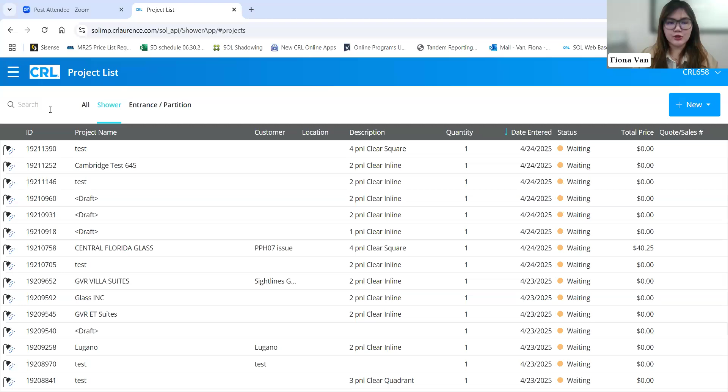The search bar is very similar compared to Citrix. Whatever you want to search up - let's say you want to search a project name containing 'test' - go ahead and search it up, and everything including that test word is going to show up for you to select.

So these are for you to select. You can look up using ID number, anything that you can think of. And if you're done and don't want to look it up anymore, go ahead and click X. It's going to prompt you back.

Before jumping into anything else, I want to make sure I cover the logo as well. When you jump into web base, your logo is going to be a default logo. So if you're new to the Shower Online program, I highly recommend changing the logo right away.

Another thing is, if you are subscribing through Citrix and starting with web-based, all the settings you have for Citrix will be automatically synced to web-based, so you don't have to redo everything. Now, if you want to change or add something, it's going to be automatically synced to both web-based and Citrix as well.

Before jumping in, I want to make sure I cover everything here. Of course, when looking at the summary of all the projects, you will see the ID, the project name, customer, location of the project, the description, quantity of that project you just created, date entered, and then status.

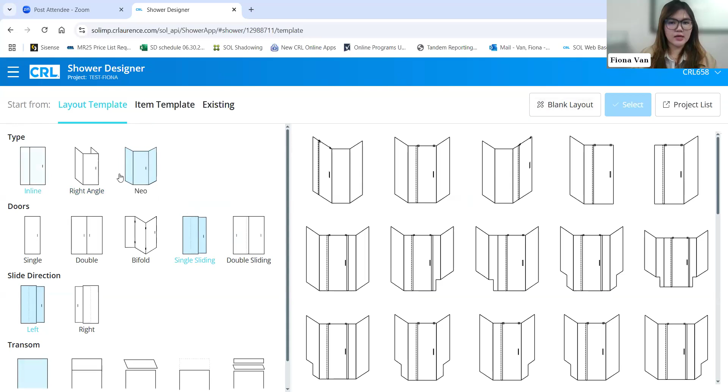Before I jump into that, I want to test something really quick. If I jump into blank layout right now, it's going to prompt me to the second tab, which is layout, where I can select a customized layout. Now, if I was in layout template earlier and I double click onto any of the template, it's going to prompt me to the design page right after.

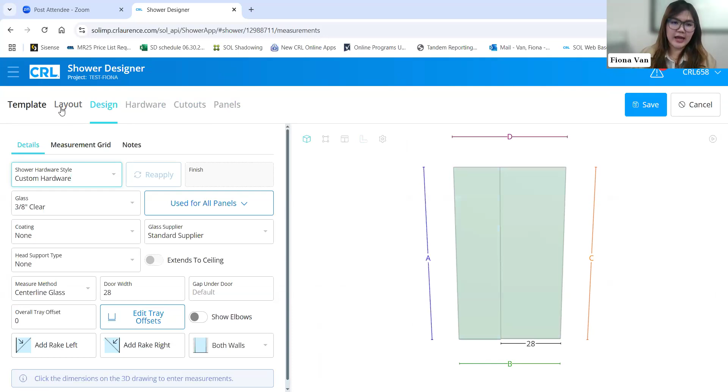So if you want to edit your layout, go back to the layout tab, where I'm going to go ahead and start with this project right now. I'm going to go ahead and remove and start everything fresh.

So when I'm in a layout tab and it's a customized layout, I can go ahead and select if I want the shower to be inline or right angle or neo. And I can basically enter the name of the sections that I'm building up right now.

For the project, you can either add rake left, rake right, or if you know both walls, or if it's going to be running to only the left wall or right wall. So for this project, I'm going to start with hinging my door left.

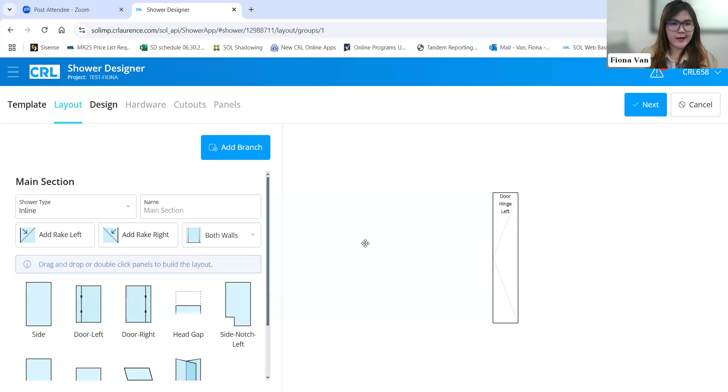I'm going to go ahead and create a side panel as well. However, I'm also going to add another side panel over here. And let's say on the door itself, I'm going into the detail of each panel now.

So let's say on the door itself, I want to have a fixed transom. Okay, so once I select the fixed transom, I can go ahead and select next.

It's going to prompt me to the junction between panel number one and number two. So over here, I will be able to fix if I want to add any nib or any notch. So over here, I'm going to keep it at 180.

But if I click to the next one, it's going to add right here if I want to add any top nib, left fall, right fall, or any notch. It's also going to ask me if I want to extend the transom to the side panel over here as well. If I click fix transom over here, it's going to extend it for me.

Okay, so for this one, I'm just going to select no right now, and I'm going to click next to the next junction between panel 2 and 3. So let's say over here, I just want to do a return panel.

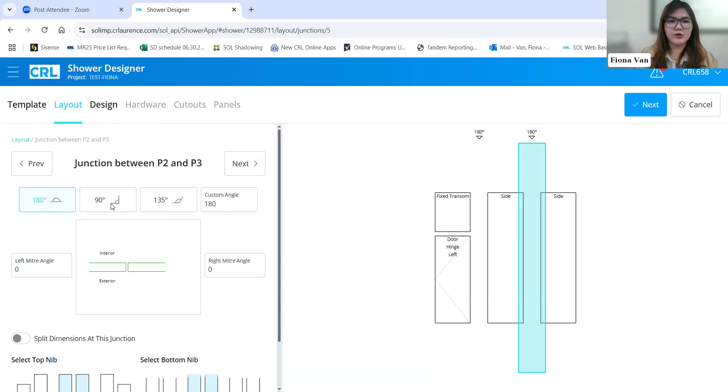I'm going to click 90, so it changes to a 90 degree angle of the panel, of the junction between panel 2 and 3. Over here you can select the intersections, whether you want miter, square, left panel overlap, or right panel overlap. Here I'll just keep everything the same because this is panel overlap, no miter. So the glass is going to look like this, right?

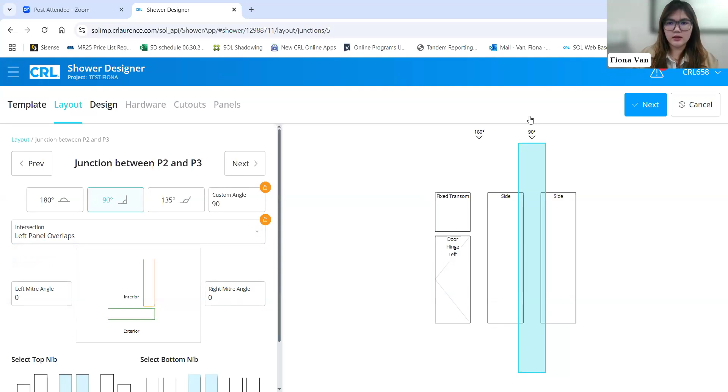Now if I click miter, it's going to automatically change my miter angle of the glass to 45 degrees from the left and right side. So I'll go ahead and select this one again and then click onto the third panel. Same thing all over again, I'll just keep everything the same.

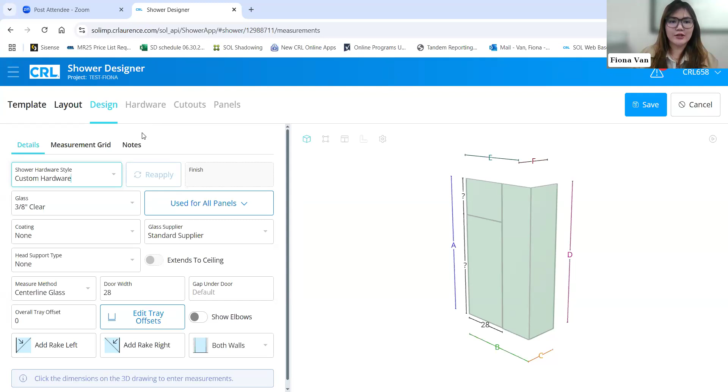Once I'm done with the layout, I can either click on the design tab or click next. When I click next, it's going to prompt me to the design tab again. So over here is where I'll start entering all the details of the shower. Now you can see this is the 90 degree we just selected earlier.

Over here, we already compiled a list of styles that we recommend to our customers, or that are among the most popular. We compiled a list for you to select from, but if you want to add anything else, please let us know.

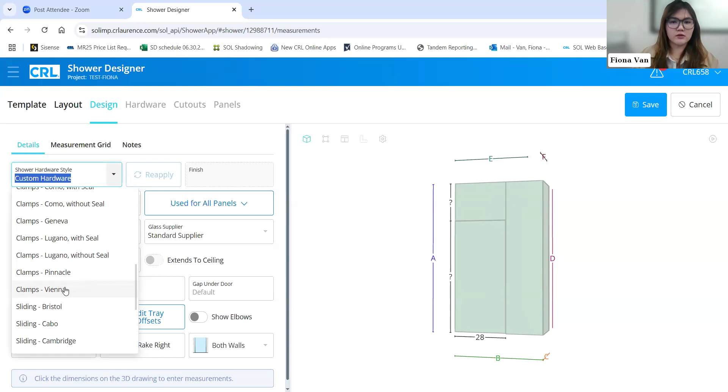Over here I'll just do something simple like Clamps Vienna, and it's going to ask what kind of finish you want. I'll do oil rubbed bronze. And then what kind of glass? Over here we have a list of glass for you to select.

Used for all panels is going to ask what kind of glass you want to use for panel 1, 2, and 3. So for the coating itself, you'll be able to select all of the most popular ones as well, and then of course a glass supplier if you have multiple.

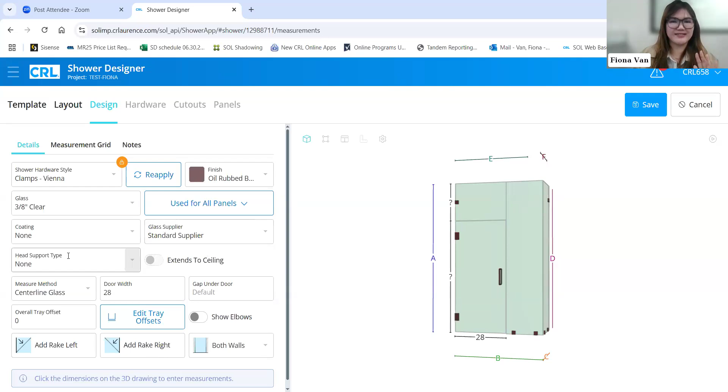I'm going to keep the head support to none right now. It's going to default to none either way, but you'll be able to edit later. However, I do want it to prompt up some issues so that we can look into it, so over here it's going to always black out.

Over here you'll be able to select the measure method. We always, for our program, default to centerline glass. However, you'll be able to select however you want it to be.

The door width always defaults at 28, but you'll always be able to edit it. Gap under the door is going to default for CRL as well, however you'll be able to edit it on the panel later on.

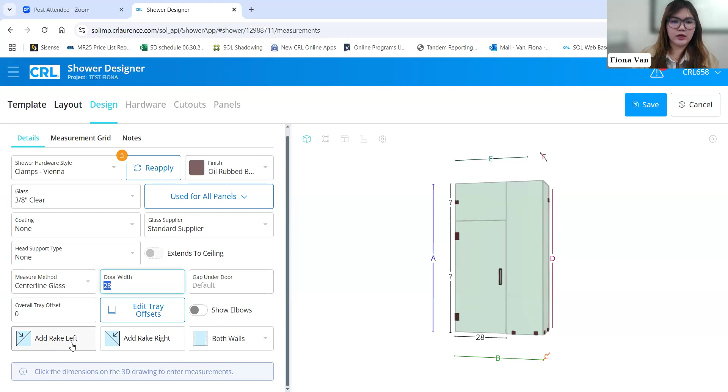Over here there's going to be some overlap when it comes to selections. Of course, it's going to ask you again if you want to add or remove rake on the left or right hand side, and if it's going to be left or right walls only.

Yancy, anything you want to jump in with right now? I think you've been doing such a great job.

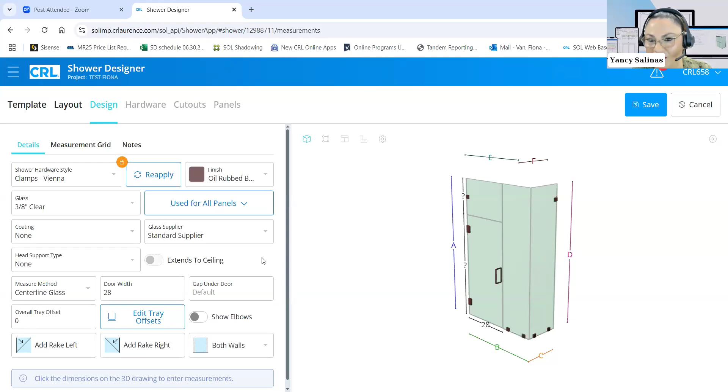Just some minor things here. I know Fiona mentioned this earlier, a lot of the features here are the same as our Citrix version. However, the user friendliness, the fact that you can see the screen here in 3D, the picture quality is a little better with the 3D rendering. We have different options here on the screen where you can have a plan view, a panel view. If you choose to copy the image to the clipboard, you can also do that here. This tool is very versatile, very intuitive, and customizable.

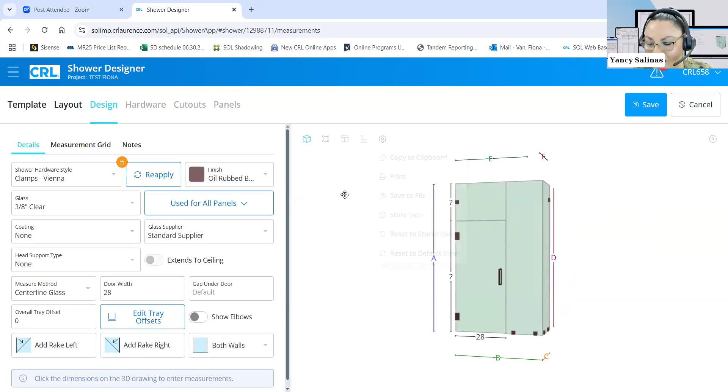I've seen very simple showers created in this tool. I've seen very complex showers created in the tool.

Also, if you have any questions, I did share Fiona's email address in the chat should you have any technical questions regarding a specific design, or if you see that your numbers are not adding up, or any discrepancies, please feel free to reach out to both Fiona and myself. I'm pretty savvy with the tool and its features, but I must admit I'm not 100% an expert in the hardware. My expert here is Fiona, so I will definitely route you her way. But no, you're doing a great job.

Again, with the rakes and the elbows, you're able to do that customization. So far I don't have any questions. Actually, I just saw one from Marcia.

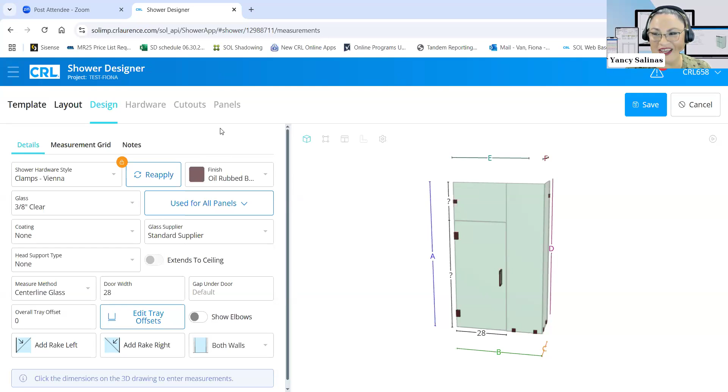Okay, Fiona, please continue. Thank you. Of course. So the next tab I'm going to focus on is the measurement grid over here.

You will see a lot of repetitive questions for you to edit the shower again, but I'm going to ignore all of this and move down to the dimensions where you'll be able to enter them. There are two ways to enter the dimensions: the left side and the right hand side. Over here you'll see that it's color coordinated.

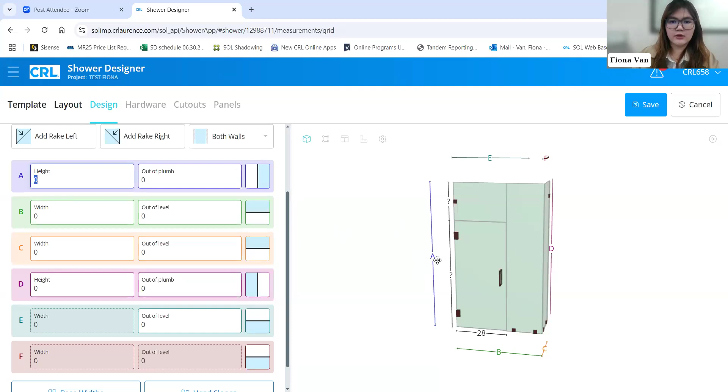You should be able to enter A and correlate it over here to A. I'm going to do something simple like 70. Let's do the width of the B over here at 45. And then I'm going to do the width of the C section, which is this panel over here. Let's do something like 30.

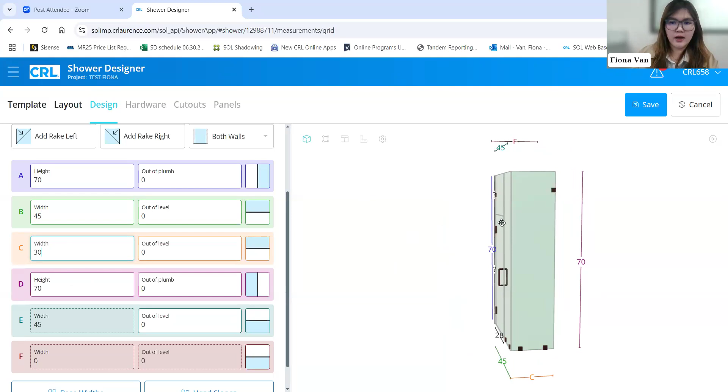So over here, it's going to automatically prompt the height on the right hand side to 70. Now let's say you have anything out of level on the bottom that will be impacting this one. I would enter the out of level as half inch.

I would go ahead and click this. It's going to ask you which side you want it to be out of level. And then it's going to prompt the height of the D section over here to coordinate with the out of level as well.

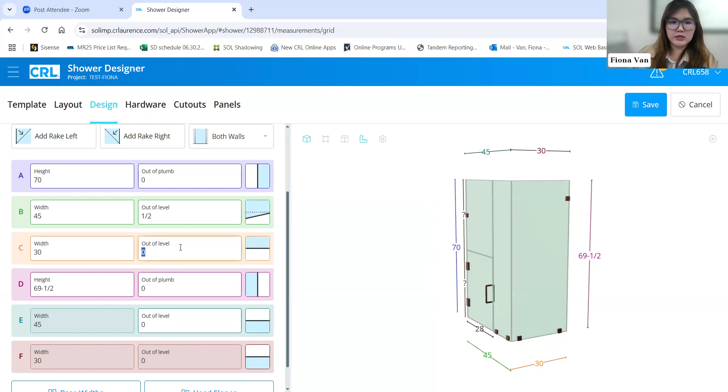Let's say on the C, I'm going to do half inch out of level, and on the opposite side it's going to prompt me back to the 70 inch, because I have this side up and this side down again. So the height of both is going to be the same.

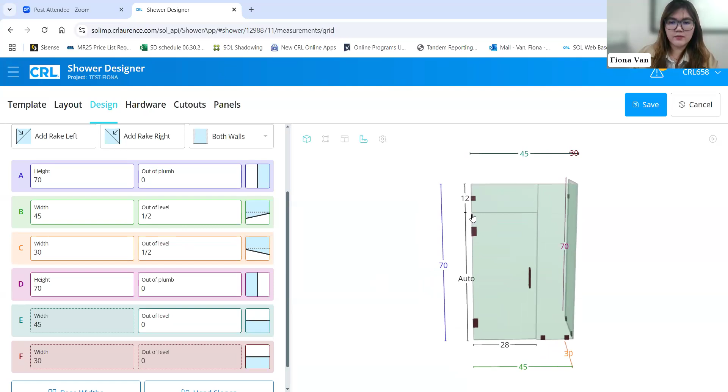I'm going to keep this for now and move on to over here, where I'll be able to enter the transom height. So over here I'm just going to do something simple like 12 inches for height, and it's going to automatically calculate the door for me.

Okay, so once I'm done looking at everything, I can move on to the next thing. If I scroll down, it's going to ask me about the base width and the head slope. On the E section over here, you see the color E, which is kind of emerald.

It's going to ask you for the level on the top, right? So over here it's going to correlate to the head slope that you'll be able to review as well. Because you have a bottom slope down, it's going to ask you if you have anything out of level on the top as well. Over here you'll be able to edit the outage.

So it's going to ask you column one for the fixed transom, and then for the side over here as well, so panel one and panel two. Right here, right? You'll be able to see that panel one is sloping up and panel two is sloping down. I'm going to go ahead and do everything at zero right now.

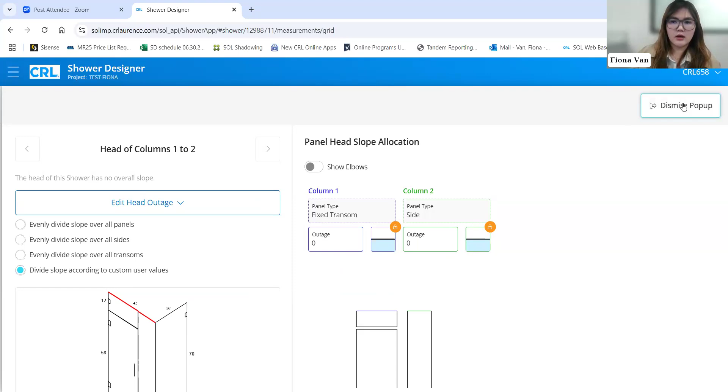So that's simpler for us, and then close this pop up. The second thing I want to touch on is the base width, because we already checked the slope on the top. Now we're going to check the bottom, which is the base width.

So over here, same concept, it's going to ask you: do you want the glass width to be 28 or do you want it to be 26? I'm going to do 26. So it's going to be automatically calculated for me on panel number two, because I entered the total of this as 45, it's going to automatically calculate it for me.

On the bottom, it's going to have a base slope of 5/16 on the first panel and then 3/16 on the second panel. So everything adds up to a half inch slope from left to right, sloping up from left to right, from panel 1 to panel 2. You'll be able to edit this over here, and there's also a summary for you as well.

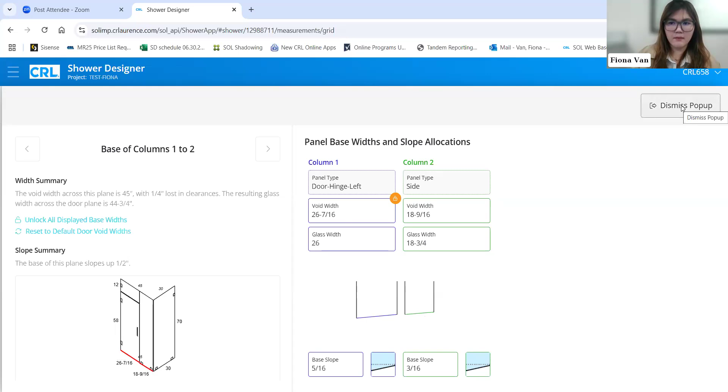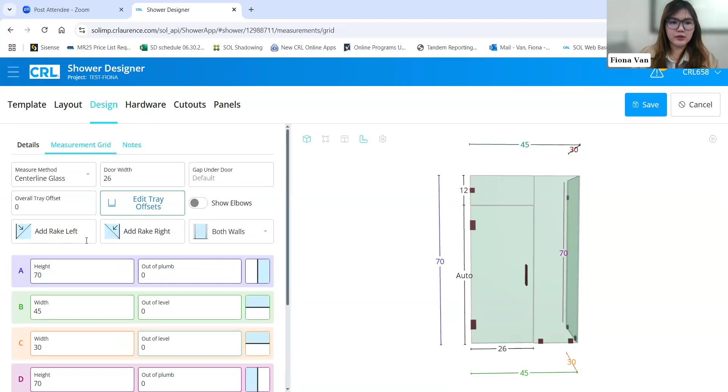So once you finish with this, go ahead and click on this to close the pop-up. It's going to prompt you back to the main page. For the purposes of this project, I'm just going to keep everything level out at 0, so it's easier for us to follow. Okay, so once you enter all the dimensions, go ahead and jump into notes if you want to add any additional notes on the installation itself.

So this is where you will be able to add it. Once you finish with this, go ahead and save your work, and then it's going to prompt up a warning for me.

Now, when it prompts up the warning and you accidentally close it like I did, go ahead and click on the triangle over here up top. It's going to basically give you a serious warning, a safety warning, or any moderate warning over here.

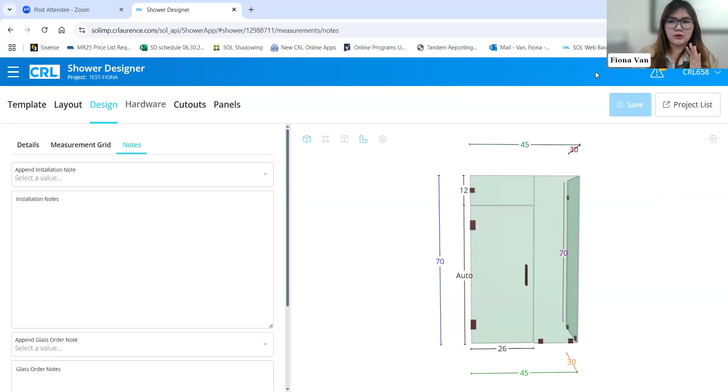So over here, it's saying that I have to add clamps on both the left and right hand side of the fixed transom. So I'm gonna click directly on the warning itself. It's going to prompt me to the page where I can fix the issues, right?

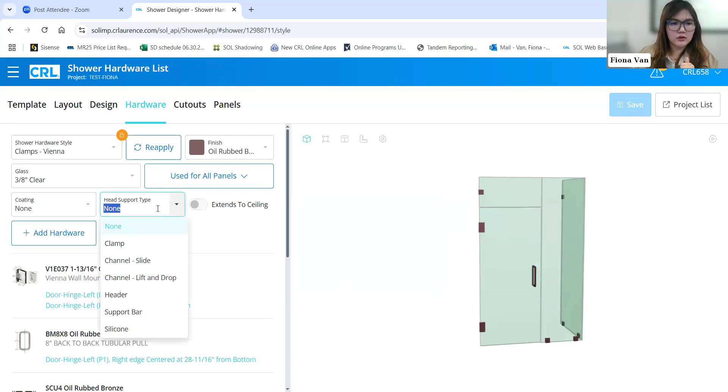A couple of things that I want to highlight is because I don't have any head support, and that's the reason why it's prompting up the different clamps for me. So I'm going to go ahead and do a clamp for head support, reapply for the head support.

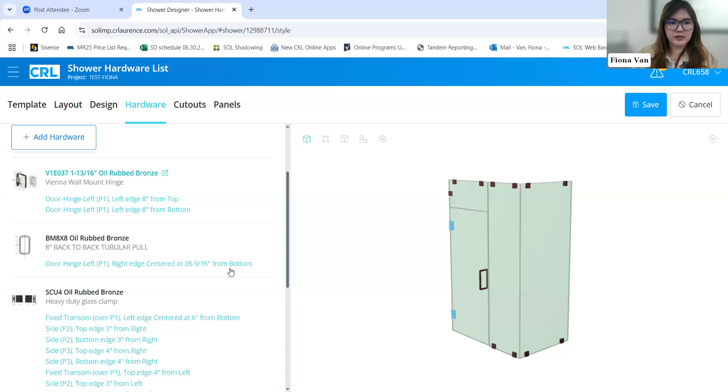Now, when you select a clamp for Vienna, it automatically adds all of the required hardware to this project. So for example, if I picked Vienna clamps, it's gonna add Vienna, it's gonna add a handle for me, and it's going to automatically add, not transom, sorry, the clamps for me as well over here.

Now, everything is automatically added in for me. However, if I want to remove this, there's two ways that I can remove it. I can go ahead and click on the product itself and click on remove, or I can go ahead and click on this pop-up.

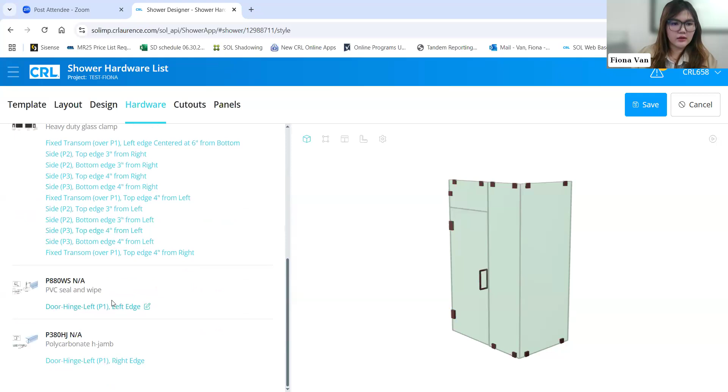And go ahead and click remove. Oops, sorry. And click remove over here.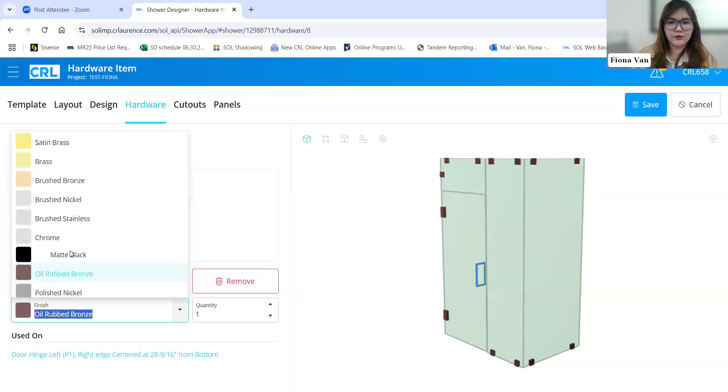Over here, if you click onto, let's say, the handle itself, you will be able to change the finish as well if you don't like it. I'm gonna change it to brass, and then you will be able to increase or decrease the quantity. Once you're done, hit save, go back to the hardware, and you will be able to also add hardware over here.

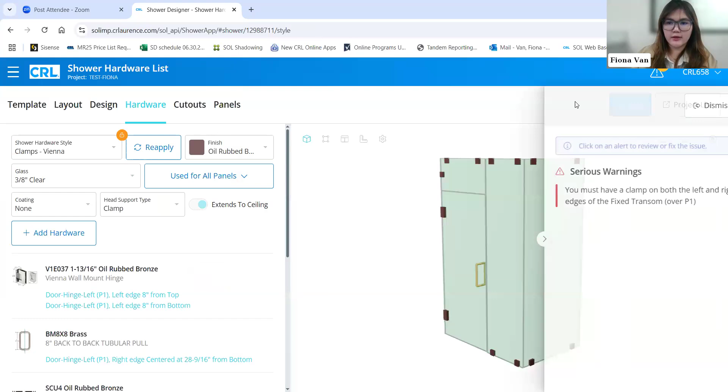So going back to the warning that I have over here, it's asking me to add a clamp both left and right edge of the fixed transom. So I'm gonna go ahead and add transom.

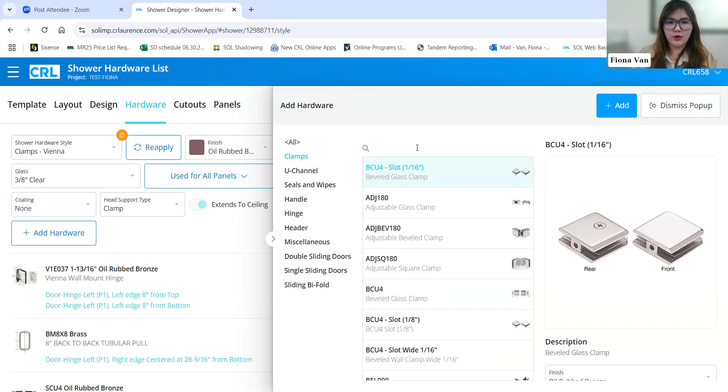You can go ahead and look up any clamps that we have with sections or filter it out for you. However, you can also search all the hardware that we carry as well. You can go ahead and search using just the regular part number, or you can also just go ahead and type in transom.

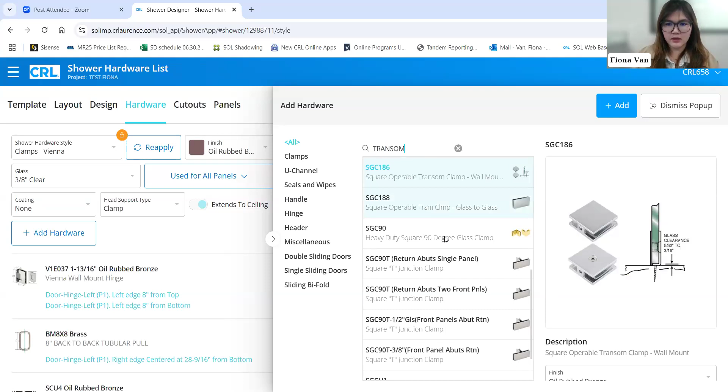It's going to prompt up all of the transom clamps that we have for you to select. Over here, I'm just gonna go ahead and add the BGC188 and click add.

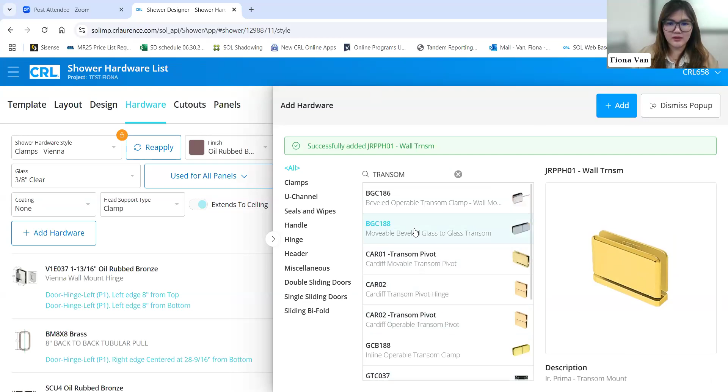Add. Sorry, my screen is a little bit too small for me to scroll down. My apologies, but I can go ahead and click add over here. Not wall transom, I selected the wrong one, but I can click on BGC and click add over here. It's going to say that I successfully added BGC188 to the project.

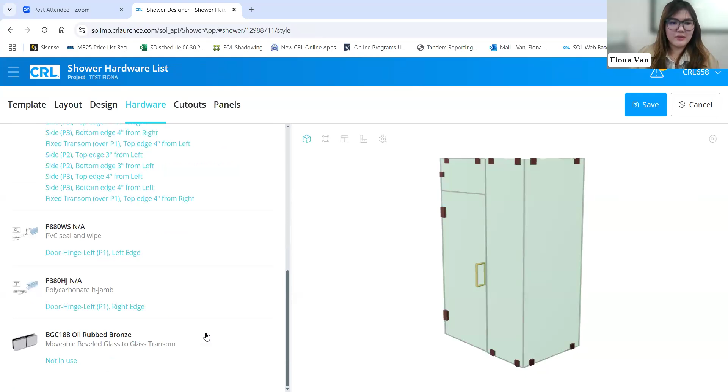Okay, when I add it in here, I'm gonna go ahead and remove this because I accidentally added this and this. It's going to say my BGC movable transom is not in use.

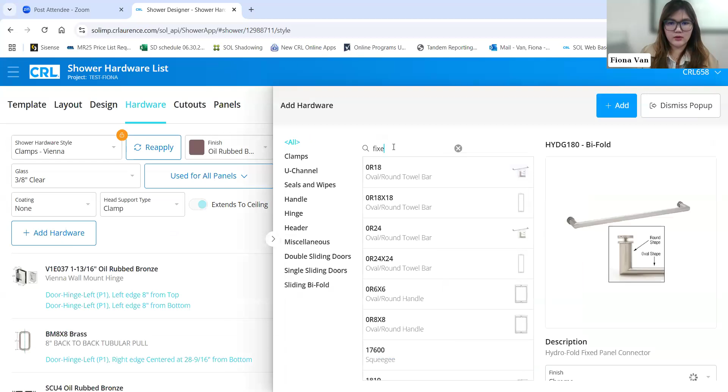Now, because I picked the fixed transom, that's why it's not going to automatically add it in for me. I can go ahead and click on this and remove this, and I can add another fixed transom. Let's see if it's going to pop a fixed transom for me.

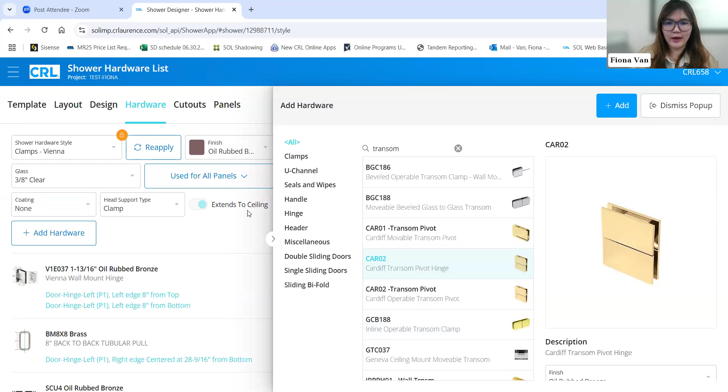Yeah, my apology. I think that my screen is not scrolling down as much as I want it to be. So I'm going to go ahead and remove transom. I do apologize for that. However, you will be able to add the fixed transom when your screen is functioning properly.

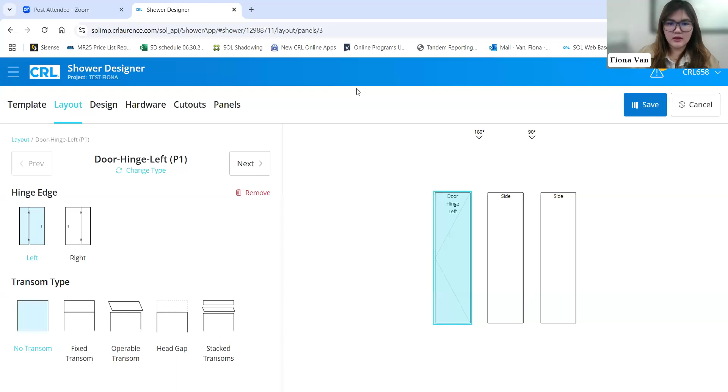So I'm gonna go back to the layout. It's gonna be a little bit messed up, but I'm going to go ahead and do no transom for this one. Okay, I'm gonna save this and then go back to the hardware tab.

So now over here, because I don't have any transom, it's going to just ask me to remove all of the SCU4 that are not being used in the system. So over here, I would be able to click on the SCU4.

There's three that are not in use in the system, so I'm going to deduct it to 8 and hit save. Once I saved everything, it's going to remove the warning for me on top.

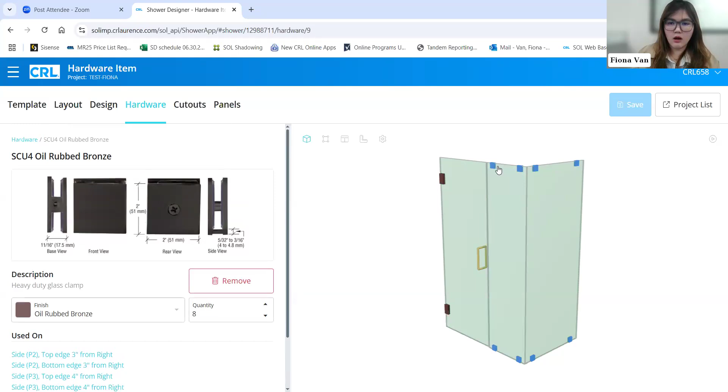Now I'm going to go ahead and jump into each location of the hardware. Whatever you have on the left hand side is going to highlight on the right hand side. So because I click on SCU4, all of the SCU4 are highlighting up right now. If I go ahead and click on this one, it's going to highlight on the right hand side which one I'm selecting.

This is going to prompt me to the glass drawings of that specific clamp. If I want to change this to, let's say, the hinge itself, I can click on the hinge and it's going to prompt me to the same cutout of the hinge.

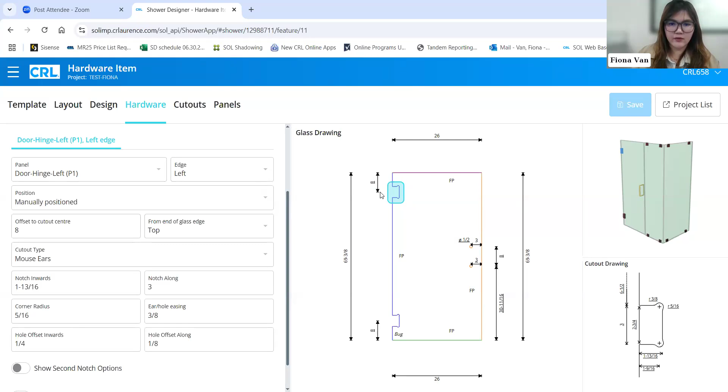Very self-explanatory at this point. It's going to show you the hinge, where is it hinging off, which panel, which is panel number one, the door, which edge is it? It's going to be left edge over here. What position is hinging off is saying 8 inch from the top, so it's hinging 8 inch from the top to the middle of the cutout. So what kind of cutout type? This is default whenever you're using CRL hardware.

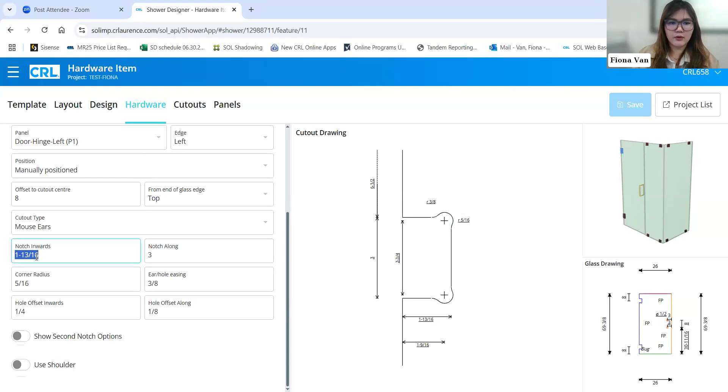You can also see the diagram of it. Now, if you are preferring your own cutout and you feel like this works for you a little bit better, you can also edit it over here as well. And you can also look at the left hand side to the right hand side, it's going to correlate the same information. For example, 1-13/16 over here, notch inward. So all of those are going to be correlated from the left hand side to the right hand side. If you want to swap it back, go ahead and click on it. It's going to swap back to the location of that specific cutout.

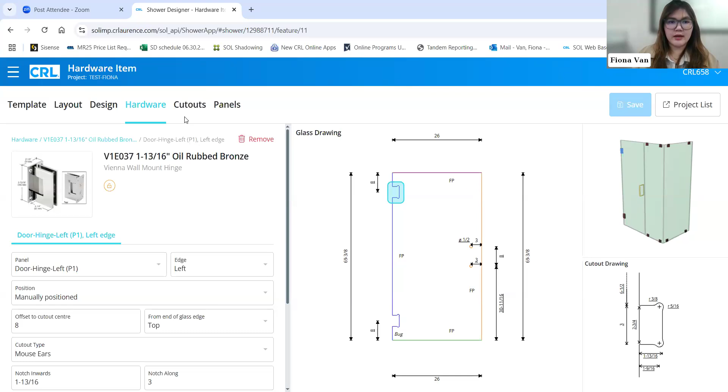Once we're finished reviewing everything and it looks correct, go ahead and move to the next one, which is the cutout tab. At the cutout tab, it's going to ask you to review everything as far as the cutout again. So of course, Vienna, BM, all of the SCU4.

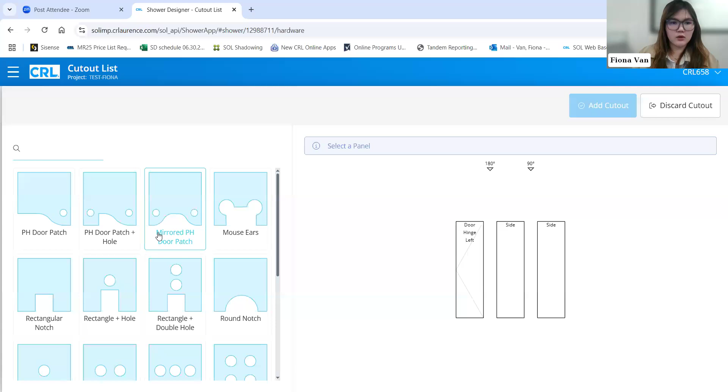Of course, in here you'll be able to edit the corner radius of the glass, or if you want to do an angle corner or remove an existing corner that you just have, this is where you're going to be able to edit it.

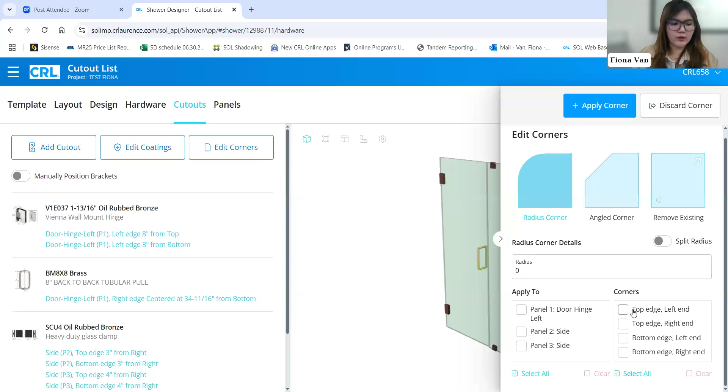Once you finish with it, go ahead and click on the panel. On the panel itself, it's going to ask you to review all of the cutouts and all of the specifications that have been added in since the beginning. So you're reviewing your glass again, the measurement of the panel, panel edges. This is where you'll be able to edit the clearance of it.

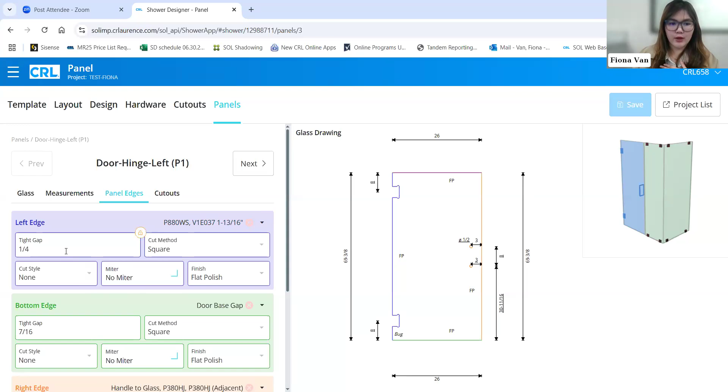For CRL, we default when it comes to clearance that we're recommending. So it's going to automatically add in the gap for you. However, this is where if you're saying that 1/16 would be sufficient for you as a tight gap and you're confident with it, you will be able to edit it as well.

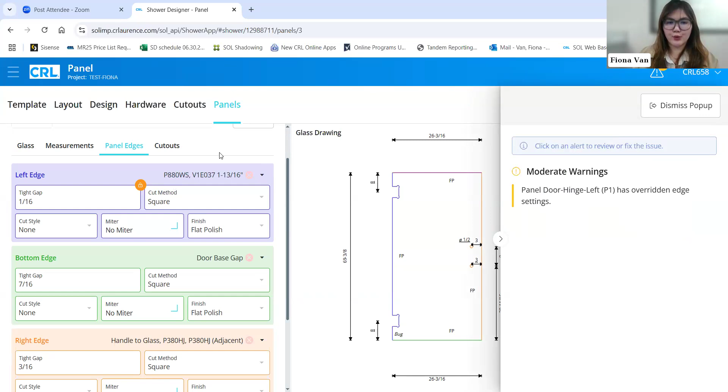Once you edit this, it's going to say locked over here. Now it's going to prompt over here a moderate warning saying that you have overridden settings that we default for. So whatever you are editing, be sure to double check and make sure that it's working before you override everything.

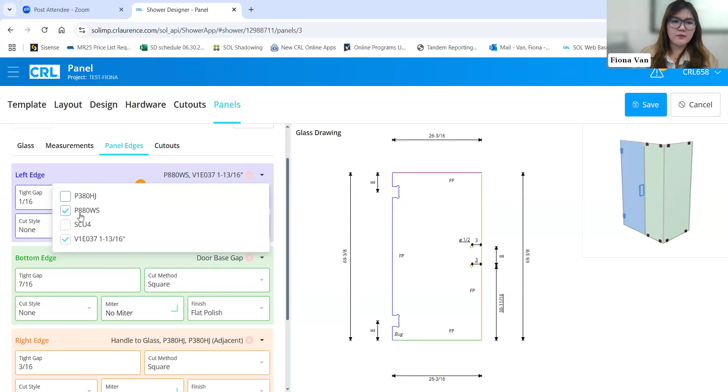Before we jump into the cutout, I also want to review all of the options that you can add in when it comes to the edge of the panel. So over here it's saying on the edge of the left of panel number one, we're using P880WS and Vienna. So it's going to have a tight gap of 1/16. However, if you are using anything for base or anything additional, you will be able to select this and it's going to change the tight gap for you.

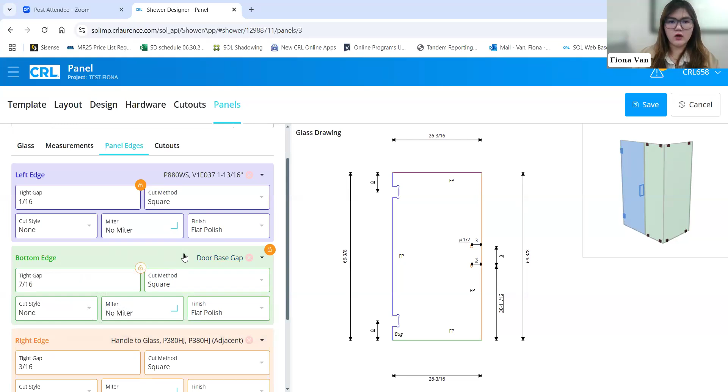I'm going to change this to the door base gap as 7/16 as default. Once you review everything, click on the cutout tab. This is going to be the same replica as this one cutout up top, so review everything carefully on each panel before you move on to the next panel.

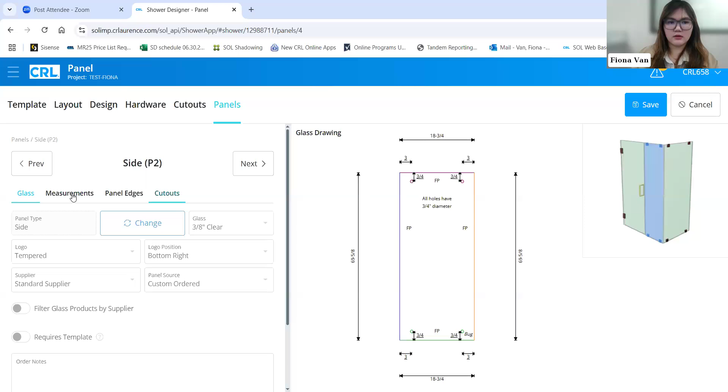When you click on the next panel, the same concept applies for each piece of panel glass. Once you've reviewed everything, hit save, and you will be able to review your template or your project again.

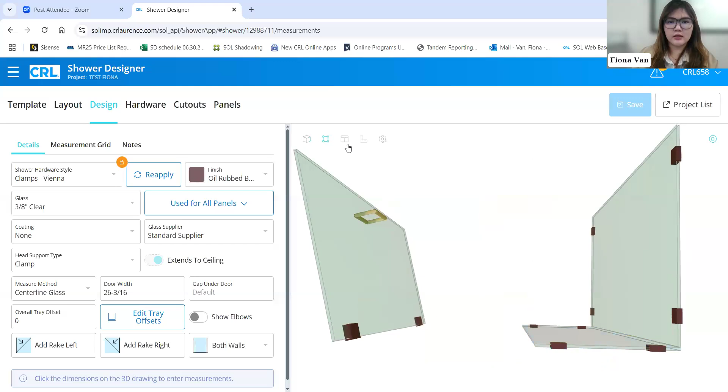For you to review your project, it's very much over here, shown over here on your 3D. You will be able to drag 360 with it or play animations with it. You can also look at top view or a bird's eye view, drag it. You can also see the cutout only for glass.

Black out again. As you can see, we are live. So, unfortunately, the room Fiona's in has a sensor, and the lights will turn off momentarily if it doesn't sense that someone's there. Apologies for that, it's energy saving.

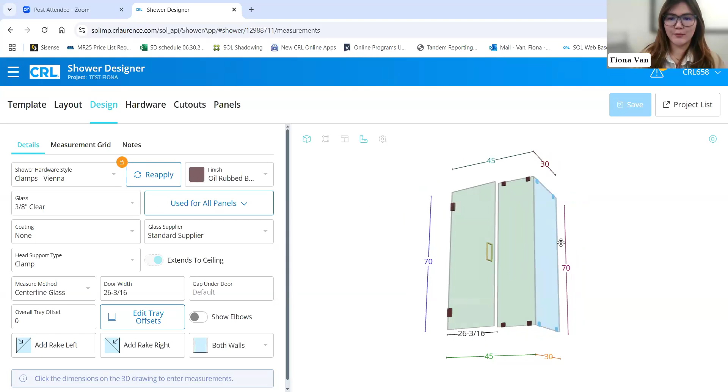Here you will be able to show the dimensions of the project that you just created when you click on this button right here.

On the setting itself, like Yancy mentioned previously, you can copy this and then paste it on any kind of email that you want to send to your customer. It's just going to copy this specific project, the 3D that you just created.

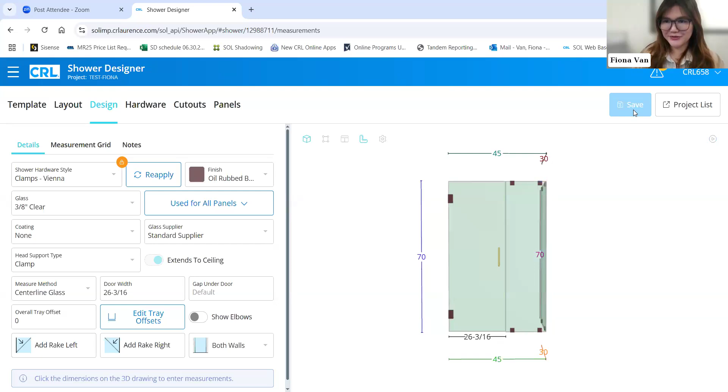Once you're finished with everything, go ahead and make sure it's saved, then click back to the project list. It's going to show you the project we just created, and give you a drop down of what you just created, highlighted over here.

A couple things I want to jump into: you can clone whatever you just created. There are two options—you can clone all the details, or you can clone the project header only. I'm going to go ahead and clone all of the details.

It's going to prompt me for this project, which it says clone for the previous project, test Fiona. Once I review everything, if I want to change anything or don't like it anymore, I can go ahead and delete it. If I delete it, it's going to prompt me back to the project list page.

I can go ahead and select the project that I just created, and it's going to prompt me back to the summary page. So I'm going to go over some of the options we just had, because we just created a project—you can view the project that we just create.

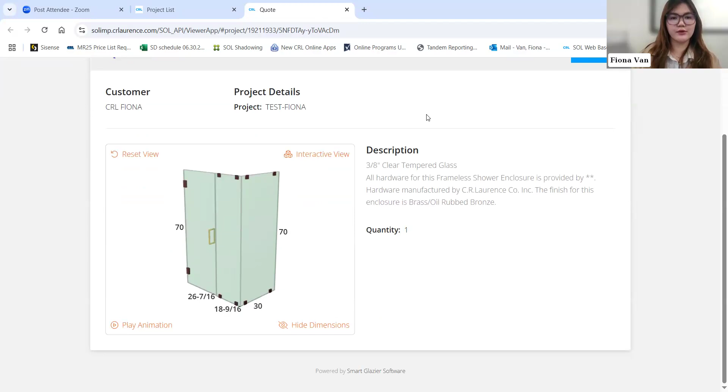The online quote is something that all of our customers send to their customer to review. So over here, you'll be able to see the project that we just created, and it's going to have the descriptions for you as well.

If I'm going back to the project list, I can also view multiple different PDFs. If I click on multiple report, it's going to prompt me to select or deselect all of the reports I can create. I'll go ahead and click on view selected, and it will download a PDF of all the reports we just created or selected.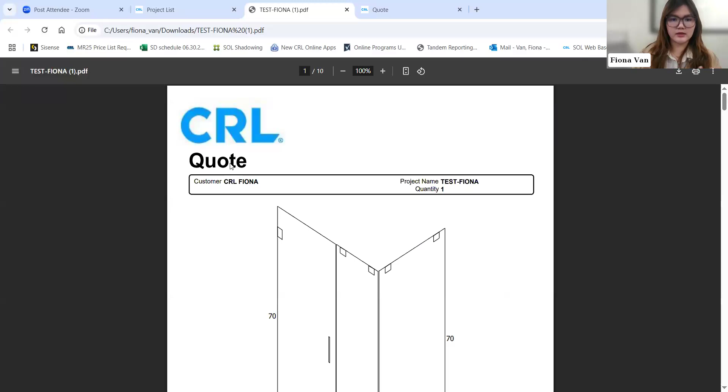When it's downloaded, you will be able to see this is the quote, says Fiona, the glass order, then the template, the hardware list that we added, and then the installation sheet. All of these will be available for you once the project is saved.

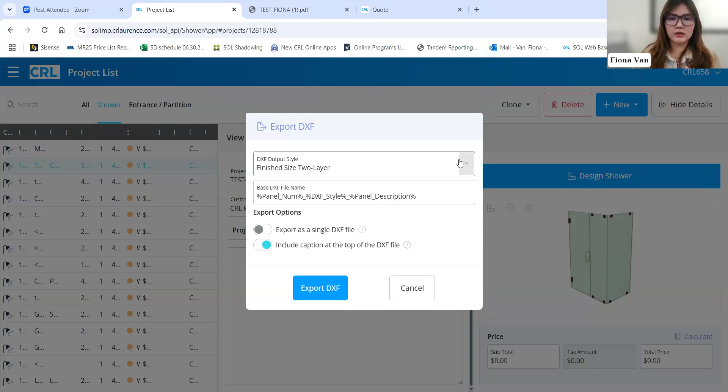Once you're done, you can also go ahead and export to DXF. I'm not going to explore too much into this since I don't have the program on this laptop, but there are multiple styles you can select for DXF as well. I'll go ahead and click cancel on this.

The next thing I want to jump into is the quote order. When you click quote order, it's going to prompt you directly to the hardware page. One thing we added recently is you'll be able to view the stock level, inventory level, for the products we have in stock for that account. So over here, you'll be able to view it.

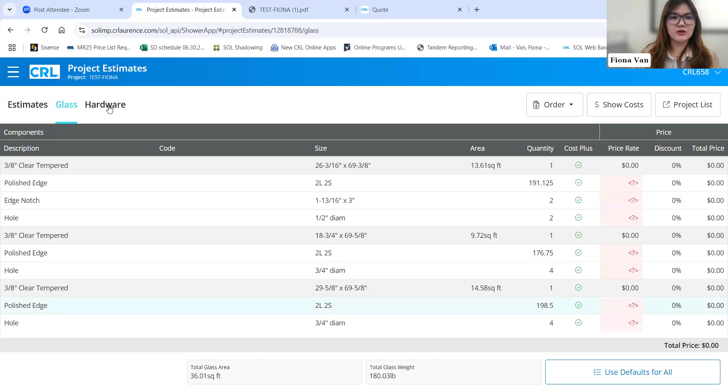There's also a glass and estimates page. Because this is an internal account, I don't have anything added on top, and I also don't have any glass prices added. So I'm just going to focus on the hardware here.

When I review everything and the customer loves the project and wants to convert it, I can go ahead and do a quote first. If I click on order and click on quote hardware, it's going to ask me all the details—delivery method and address, all of those. Confirm everything, and then you can go ahead and click on quote hardware.

When you click on quoting the hardware, it's going to generate a quote for you that you can view over here. I'm going to go back to the project list really quick so you can view it—this is going to be the quote that we just created.

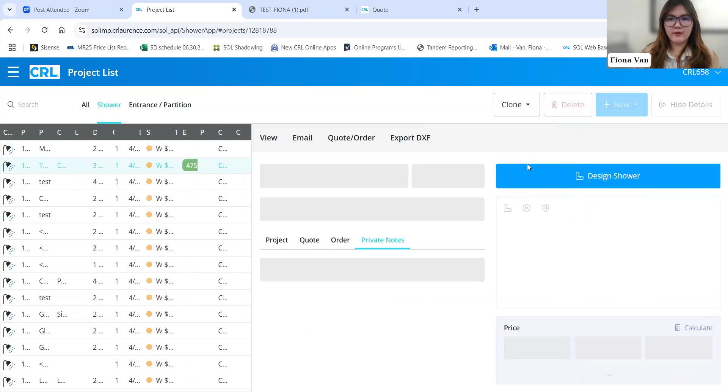It's going to say this is the quote number, this is the date that we quoted it with, which is April 24th. If I click onto it right now, it's going to give me the price of the hardware because I'm just quoting it. So once I'm done reviewing everything and the customer is ready to convert it, I can go ahead and click back to the quote order.

And now it's going to allow me to place the order. When I place an order, it's going to ask me for my PO number. If you don't have a PO number, this number will be generated from your project ID, so it's going to be the same as the project ID. It's going to ask you for shipping method, delivery method, all of the details over here.

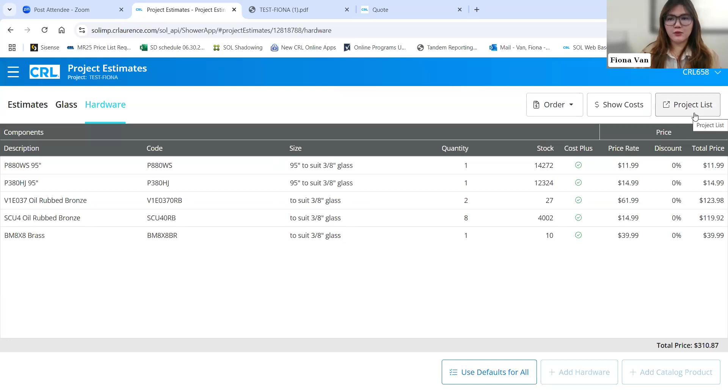Once reviewed, I'm going to go ahead over here. I don't want them to package it up for me. Once I finish reviewing everything, I'm going to go ahead and place the order. It's going to generate an order number for me, and I'll be able to check when I go back to the project list itself.

So now the project that I just created has an order number. Okay, so before I jump into something else, is there any questions or concerns? Yancy, is there anything that you want to add in?

Wow, you gave us a lot of information. Yeah, we do have several questions coming in from Edie's and from Marcia. So Marcia, yes, you asked in reference to the clipboard, is this to send a screenshot?

Yes, it will send the project itself along with the 3D image of that project. So if you copy it to a clipboard, like Fiona mentioned, you can put it on a specific document, whether it's Word or your email, and email it over to your customer. So it's for that image of the project itself.

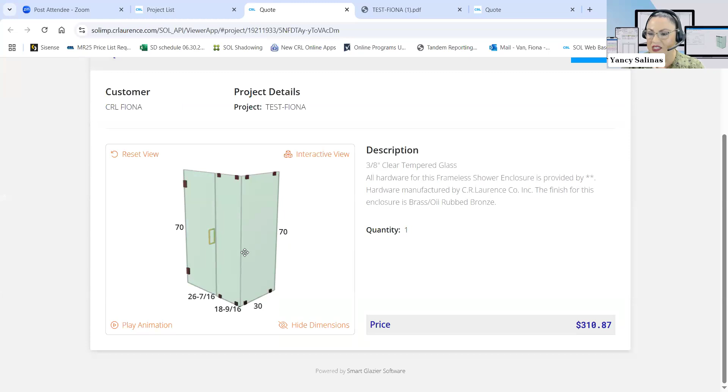However, we also have here under view an online quote. So the online quote also works the same way. The online quote just allows you to send that project over to your customer using your email with a more interactive look, where you can also click on the project itself - this is typically what the customer is going to see. So it also has an interactive view.

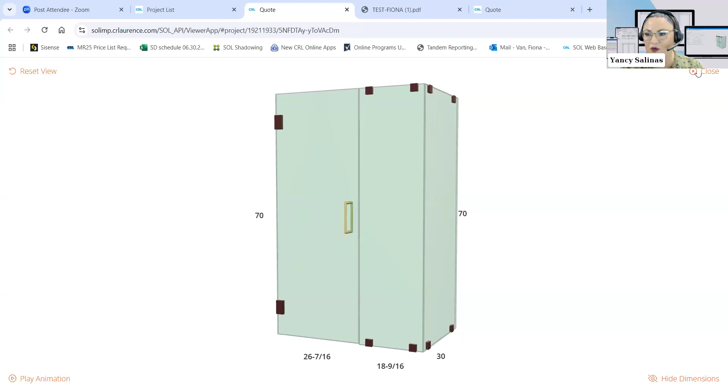Fiona, if you can click on interactive view, it will just be focused right there. Yeah, it will be focused just around the image itself, and you're able to drag and drop it and so forth. So this gives the customer that experience of using the tool and typically looking at their application through every angle. So you can do it that way too. You have a choice - we've made it pretty user friendly and complex.

So we have Edie's who mentioned - she says we use a finger notch cutout for the panel clips instead of a hole. How can we change it from a hole to a finger notch?

This is something that will be changing our default cutout as well. So Yancy, I don't know if you want to take on this question, because she's asking if we can basically change a cutout of what we already have.

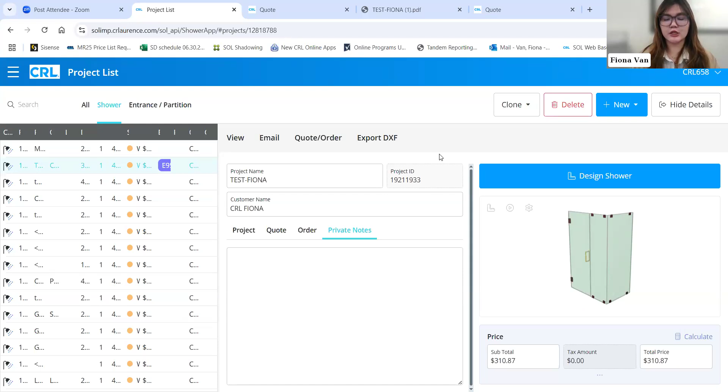Yeah, I answered another question similar. So you're able to make changes. However, you have to understand that the tool is focused to support our hardware. If none of our hardware has a finger notch instead of a hole, then you can probably create it, but you won't be using our hardware. So you can set up a template, but you cannot have it set as the default.

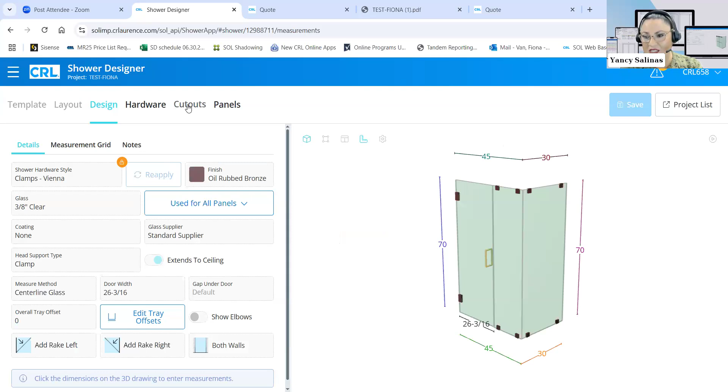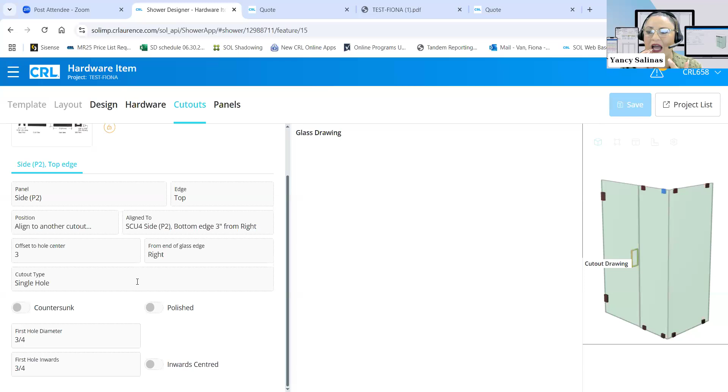All the features and all the cutouts that you see, like Fiona mentioned during the training, the different cutouts - for example, when we're creating new hardware or launching new hardware, that's when we can test it. This site, or this account, is our testing environment, our internal account that we use for either testing or for adding projects for customers who are having a difficult time designing it. So that's why it has a lot of the different options. But again, the tool is created, and the logic behind it is so that it can support our hardware.

So if we don't have hardware - and to your question also in reference to the fixed transom clamps, yes, you're right. Sorry, that happened to me too. So yes, you're right, we currently don't have, not even on our website, any fixed transom clamps. We are looking for alternatives.

I did reach out to our product management department. I know that Fiona - just because I did see this drawing earlier today, I'm pretty sure Fiona is using the drawing that was sent by a customer prior to the webinar. He specified other clamps that he's using. Obviously, do we recommend them? No, not 100%, because we want to make sure that we recommend hardware for a specific application that's not going to give you any issues. Okay, if that makes sense.

You mentioned how do we add multiple showers to an estimate? That is an improvement that we are currently working on.

I haven't tested it yet, but I'm giving you new updates. I am currently testing an update for Showers Online, and I haven't checked if it was added to this new upgrade. If it's not on this update, it will be on the next one, which should be coming before June.

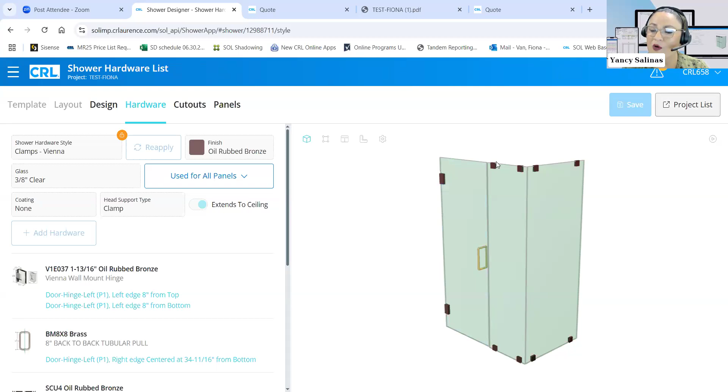As far as what's new with the online programs, the news is that we have an update. Another great change is that we not only have Showers Online as the web version, we recently launched Glass Entrances and Partitions as a web version. Now you can have these two tools in one interface, so you can have showers and glass entrances in the same database that we currently have showers.

So what does that mean? All those users who currently have storefronts, that's a Citrix-based, that third-party application, will be separate from the new projects you'll be creating for glass entrances and partitions. The Citrix-based storefronts will remain without any updates, without new hardware. We will be adding all the new hardware on the web base, so it'll be two separate instances.

So moving forward, that is the plan: we will be transitioning all of our online programs into a web base, and they're all going to be in the same interface so that you don't have multiple passwords or multiple usernames for the multiple tools.

For example, here in this screen, you see it has a tab under all showers and glass entrances. So this account has both tools, glass entrances and showers. If I wanted to create a shower, as Fiona just demonstrated, I can create a shower. However, if I wanted to create Fallbrook, one of our partitions, I can do that here as well. We have Fallbrook Excel, Fallbrook Excel New York, all in the web version.